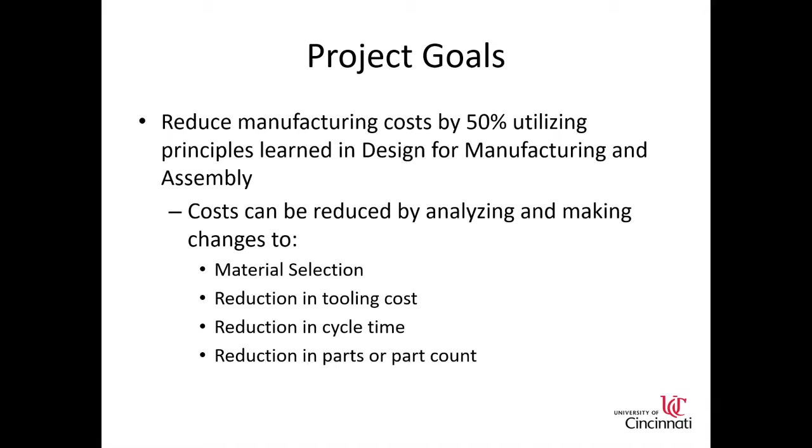So we started off by doing an analysis of the current design. An analysis showed that the right and return sides were oversized. There was a lot of extra material being used that didn't really serve a purpose. The unnecessary contours in design were the curvatures in the stainless steel plates that were 4.5 inches thick. And this also showed some narrow passageways that could possibly have nuts bind up in them, or could even possibly

crush fingers. When we looked at the process sheets, we noticed there was a lot of outsourcing being utilized, which led to a lot of increased cost and wait time. And I noticed that the entire design used 304 stainless steel, and that would be really heavy. The stainless steel is a lot more expensive than other materials like aluminum, and it's also really hard to machine, which is why a lot of it had to be outsourced to water jet. These were some of the areas that we wanted to improve to hopefully lower the cost quite a bit.

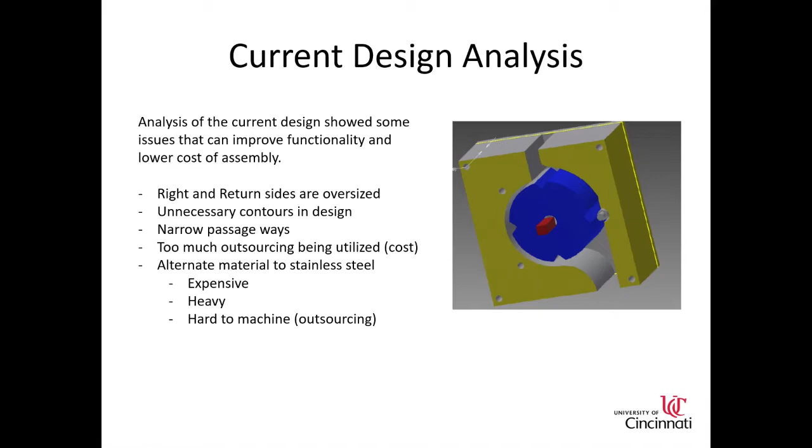And after looking at the design and analyzing that, we went ahead and moved on to the current design cost analysis. I went through all of the process sheets and added up the prices and hours it takes to make each part, and on the screen you'll be able to see a summary that showed a total cost of over $4,000 per assembly. So you have to sell each nutcracker for at least $4,100 roughly just to cover the cost it takes to assemble it.

This showed a couple really heavy areas, and that was included in the right column where you can see cost per assembly. And as you can see, 40% of the cost was on the right side, and another 40% of the cost was on the return side. And this was because it's a big 4.5 inch plate, and it's very costly in both material and outsourcing, which really caused it to cost a lot of the overall assembly.

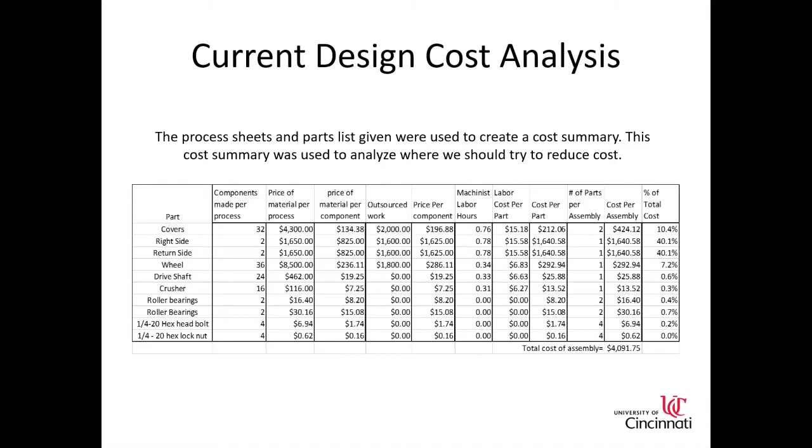So that's just a rough overview of the cost analysis and some of the areas that we wanted to focus on and improve, along with the aforementioned design issues, which we'll go ahead and move on to now. We'll start with the fact that the right and return sides are oversized. So as you can see on the screen, the circled areas are really massive. There's a lot of steel being used here that doesn't need to be used.

The part of this component that needs to be structurally strong is the side panels, as the drive shaft is connected to bearings that connect to the side panels, the cover plates. So the return and right side are really over designed, and they just utilize a lot of material that I felt needed to be removed.

The next issue was the unnecessary contours in the design. Keep in mind that this is all inside the nutcracker, so no one actually sees these contours, and really they just make a very small gap between the wheel and the wall, which could possibly cause nuts to bind up. As a nut passes by the pinion, if it were to get pressed and stuck inside the wheel, it could possibly bind up and really make it hard to turn the wheel. And these contours being so close to the wheel are not only unnecessary, but also decrease the functionality of the machine, and I wanted to remove them.

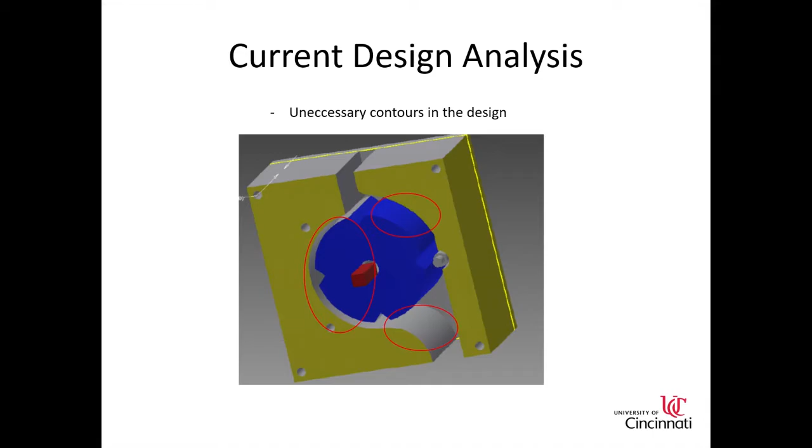To touch on that, the narrow passageways, that's where the bindings could occur, and to go along with the functionality issue, if someone were to stick their fingers in here, there's only about 1/4 inch between the wheel and the wall in the current design, so it could crush a finger pretty quick. It really only becomes a problem if you were to hook up a motor to the drive shaft, and in that case you could accidentally put your hand in the return side, which would quickly pull your fingers in, or also on the top side where the narrow passageway is before the walnut gets to the pinion.

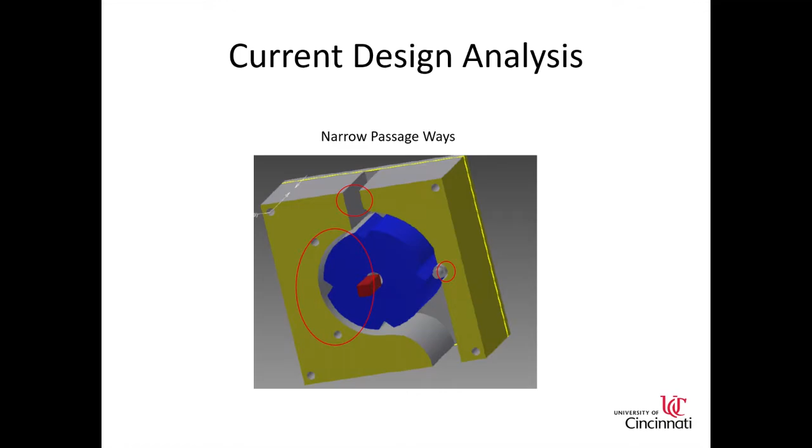These are both safety concerns and functionality concerns, and they needed to be corrected. To go along with that, I wanted to touch on the materials being used. I did notice that the entire machine was being made of 304 stainless steel, which is totally acceptable by NSF standards, but I did want to look at some other materials that could possibly be more cost effective.

One of the materials I found readily available on McMaster-Carr was 6061 aluminum plates, and 6061 aluminum is mentioned in USDA guidelines for fabricating and assembly of food processing equipment for dairy, which is actually more caustic to the materials than the walnuts. Dairy is very acidic, which I felt made the aluminum very suitable for this project, as well as it did meet all of the NSF guidelines.

Some pros of changing the material. I mentioned the return side. That is the chosen part that I decided to change, because the strength in this part is unnecessary, as the plates are the component that require the structural integrity. So some of the pros of changing the return side were the material would cost a lot less.

By ordering in 2-inch thick plates, we actually don't need to outsource anything. The mill can handle that, and it's aluminum, so it's much easier to put in the mill. The material shipping will be much lower, and as I mentioned, it's just much easier to machine. It's a lot easier on the mill. Tooling will last much longer, drilling holes and milling slots and geometries into aluminum plates versus stainless steel.

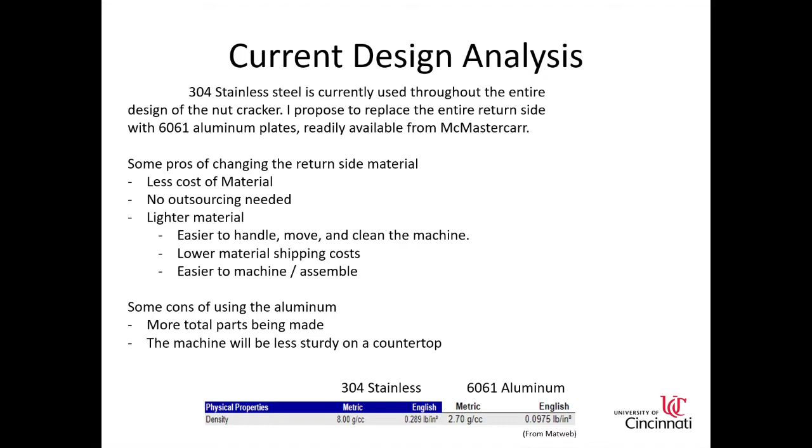And then I did want to mention at the bottom, as you can see, the 6061 aluminum is roughly a third of the density of stainless steel. So just by simply changing the entire return side, it's already going to decrease the weight of the entire assembly by an estimated roughly 50%, because of the size of the return side, which actually moves us on to the new design that I used aluminum plates for, shown on the screen now.

This is a view from the rear cover. As you can see, the return side was completely replaced by a top, a bottom, and a left side. It's flipped in the image because we're viewing it from the rear, but the left side, the top and the bottom are all made from the same aluminum 6061 plate that's 2 inches thick. And as you can see, the right side was also redesigned so that it removed all of the contours. It opened up the interior of the box a lot more.

I felt that this was much more suitable for what we were aiming for. There's more space for fingers not to get caught and crushed. It improved the space by at least double, to roughly at least half an inch. It did improve the safety and improve the functionality, which I will explain later.

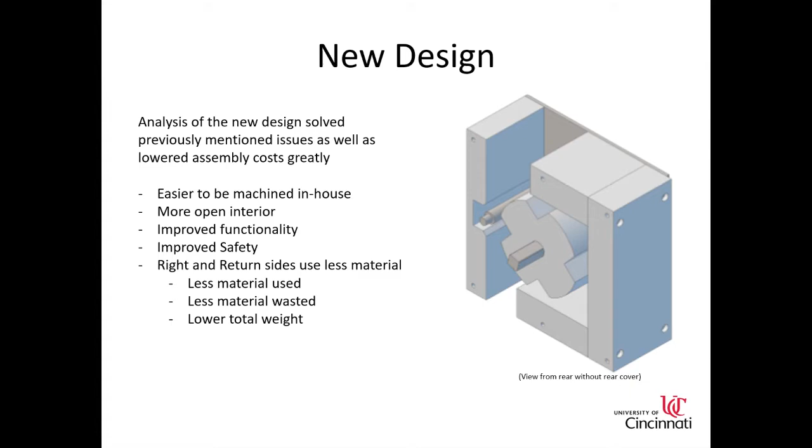And then the right and return sides also use far less material. By designing this around 2-inch plate, I was able to eliminate almost all of the scrap and waste material that was being made in the previous processes, as well as lower the total weight of the entire machine. So moving on to the actual new functionality features.

So now, as I was explaining, after it was designed around 2-inch plates of aluminum, we were able to machine all of the parts in-house and remove the water jetting from the right and return sides, which are now the left, top, and bottom. All of the parts are now machined in-house, other than the wheel and the cover plates, which I will touch on later.

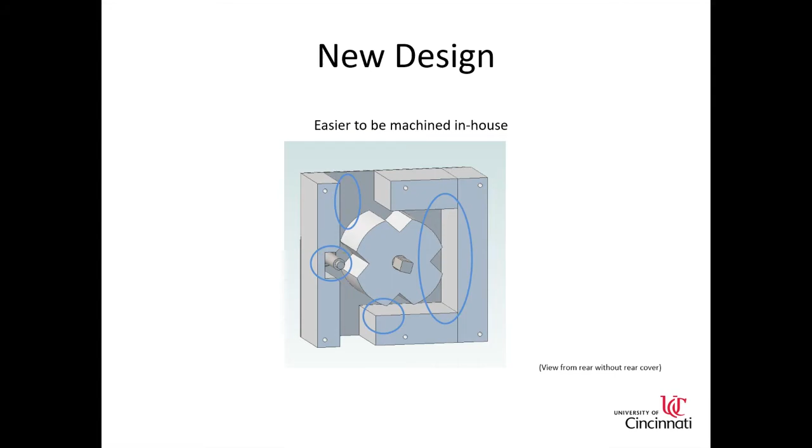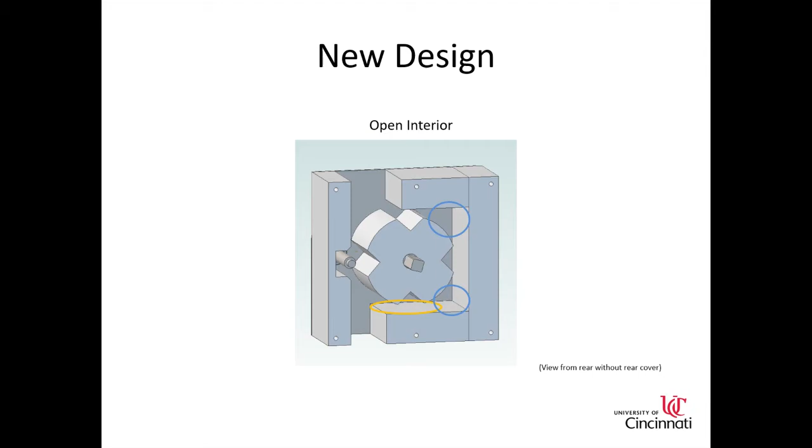But as you can see here, the flats were used so that we don't have to use any specialized CNC programming. Everything can be done with basic geometry, and all functionality of the machine is still in place. The open interior actually allows the wheel not to bind, so it should allow the user to turn the wheel at a more steady rate and pass walnuts by the pinion and crack them quicker, which should improve the functionality mentioned here.

As you can see, on the left side, we've increased the gap behind the pinion. The pinion is held in place by the bearings, so the gap behind it didn't need to be so tight, and the gap now will allow the pinion to turn freely and hopefully crack nuts a little quicker. The top, the left and the right side are the increased openings.

The top actually was opened up by another 2 inches; originally being 1.5 inches, the top is now 3.5 inches, and by doing so, this creates somewhat of a hopper so that you can fit roughly 15 walnuts in the top and then turn the wheel to crack them all. And by making that larger, we were also able to move it closer to the side, which allows the walnuts to fall directly where they're being cracked by the pinion.

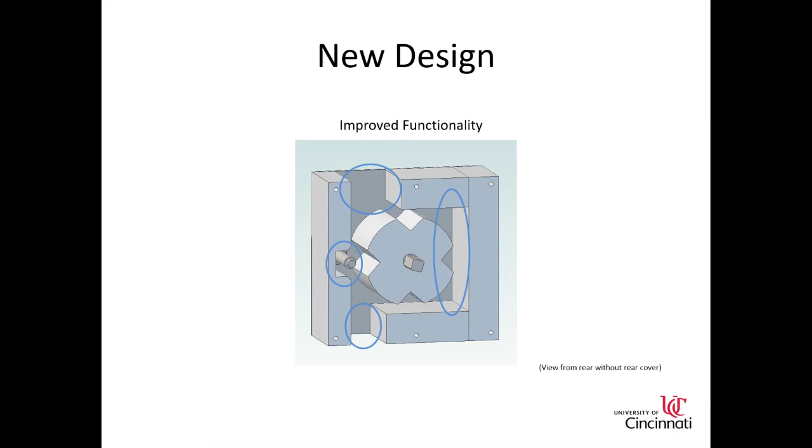As the wheel turns, the openings will pick up the walnut just before the pinion, and it'll crack it and drop it directly below. And we made the opening on the bottom smaller so that the nuts should come out in a nice neat pile.

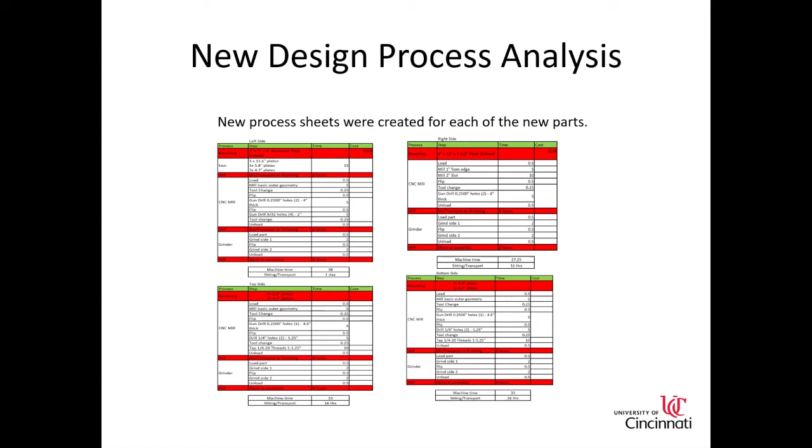After redesigning everything, I did create new process sheets for each of the parts, as you can see here. And I also went ahead and redesigned the cover plates process sheets. I did away with the large material order and found some 12 by 12 by ½ inch plates on McMaster. These ½ inch plates quote a tolerance of plus or minus 0.055 inches, which should be plenty fine for the cover plates. This allows us to order the materials much easier.

We don't have to order 32 units worth of material for one process. Let's say we need to make 10 nutcrackers, or we need to make 100. We can order 10 plates, we can order 100 plates. The order management is much easier, and this also removes all needs for water jetting, and that lowered costs greatly. As you can see here, it lowered water jet costs by $2,000, and it also lowered the material cost by roughly $20.

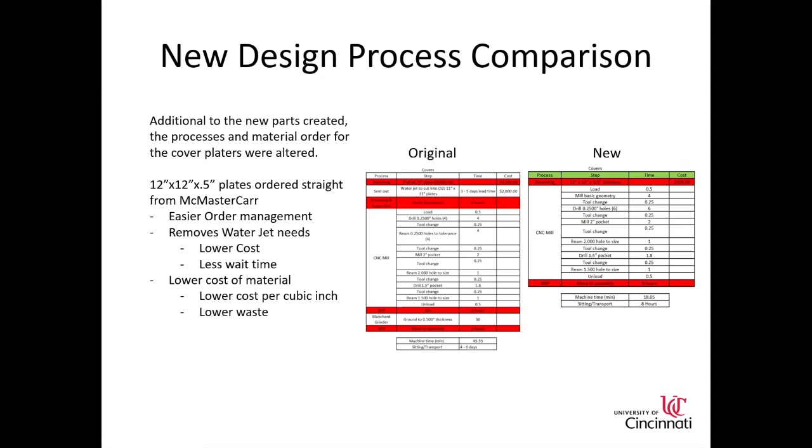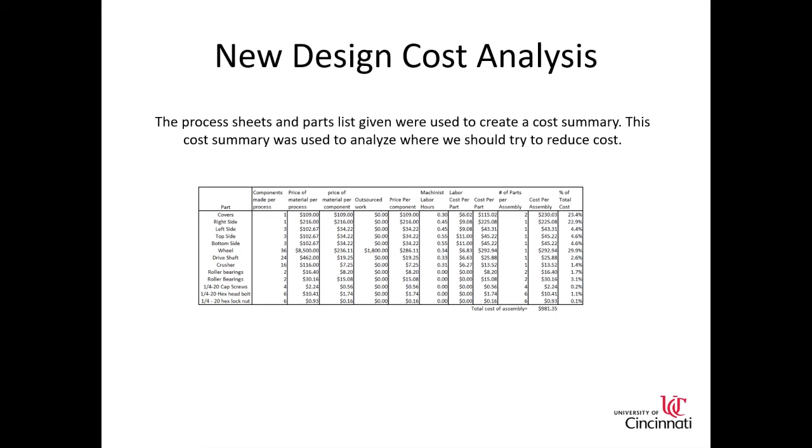The wheel is the one part that we still need water jet for, and the covers and right side are roughly the price they are due to the fact that they are all made of stainless steel. The parts that cost the most are made of stainless steel, but this material was found to be very suitable for the components and their purpose in this machine design. So in conclusion, there was a 76% cost saving. That was far greater than the 50% cost saving we were aiming for.

And to further touch upon the design, I did want to mention that a DC motor could be hooked up to the drive shaft, and if so, the nutcracker itself should be bolted to the tabletop. This was estimated at an additional cost of around $10 to the bottom part, which in turn added roughly a total of $10 to the overall cost of the assembly and only increased the total cost of the new assembly by roughly 1%.